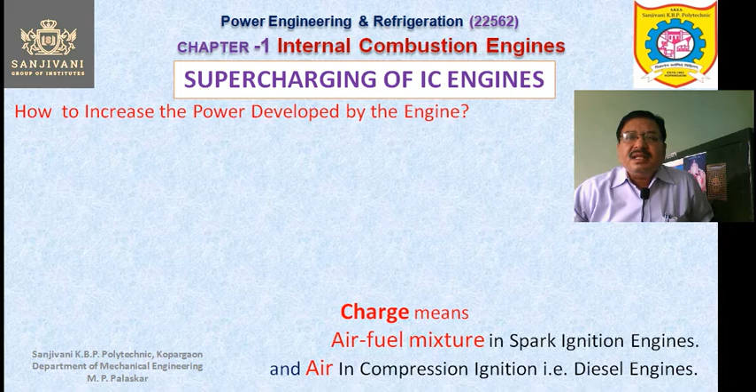So coming back to the supercharging of IC engine, let me ask you one question, that if you want to increase the power output of an existing engine, what will you do? How to increase the power developed by an engine? That is the question. Now in order to increase the power, common sense tells that you have to burn more fuel per unit time. If you burn more fuel per unit time, then the power developed by the engine will be increased.

But my dear friends, for burning of more fuel, you need more oxygen. So burning means it is the process of combustion, and combustion is the process of combination with oxygen. So for burning of more fuel, more oxygen, that means more air is required. If the quantity of air or oxygen is insufficient, then incomplete combustion of the fuel will take place, and this will lead to the wastage of the fuel, and more power will not be produced. So for producing more power, of course more fuel will be required, but more air, more oxygen is also required, then only more power can be produced.

So this can be done by inducing more charge or more air inside the engine cylinder per unit time. So again the question arises, how to induce more charge or more air per unit time? How to allow more air to enter inside the engine cylinder in a given time? That is the question. Because we are not changing the size or volume of the engine. We want to obtain more power from the given engine. So what can be done?

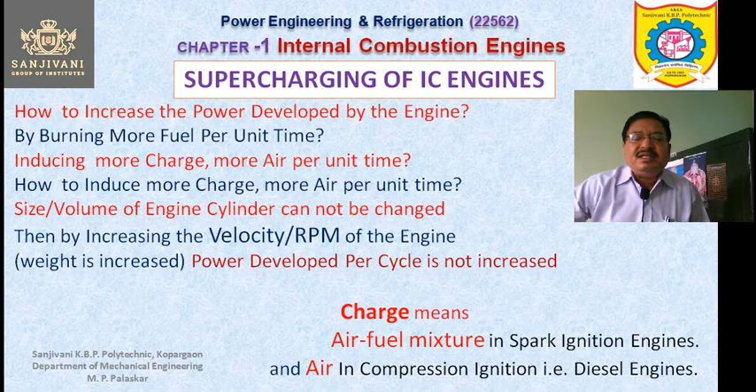So what should be done? What is the solution to this problem? How to increase the power developed by the engine? This can be done by increasing the mass or the density of the charge which is induced inside the engine cylinder. But here the mass of the charge which is entering inside the engine cylinder depends upon the atmospheric pressure. So the atmospheric pressure limits the mass of the charge which is entering inside the engine cylinder.

Of course, we cannot increase the volume because the size of the engine is fixed. The size of the combustion chamber is fixed. The diameter of the engine cylinder is fixed. So we are not changing the geometry of the engine. But we are interested to increase the mass of the charge which is entering inside the engine cylinder, and this is limited by the atmospheric pressure. So if you want more mass to enter inside the engine cylinder, we must increase the density because volume is fixed. So if you increase the density, then automatically mass will be increased.

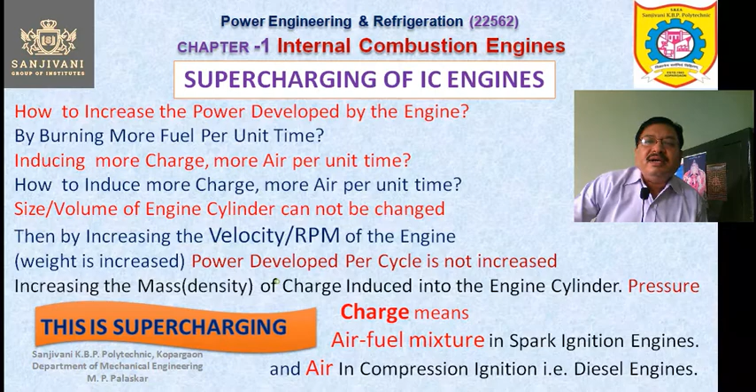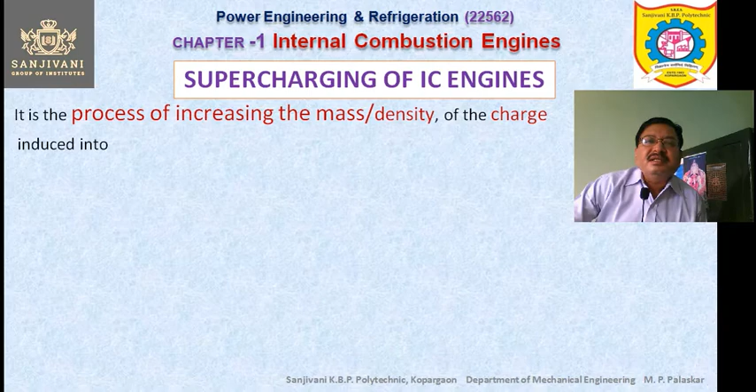Now let us go ahead to study something more about supercharging. Supercharging is the process of increasing the mass or density of the charge induced into the engine cylinder and thus increase the power developed by the engine. So this can be done with the help of a compressor or a blower. We can use some compressor or some blower that will increase the pressure of the air of the charge, and this will be supplied to the engine.

So the compressor is generally a rotary compressor. In case of turbochargers, which is one type of supercharger, we are using centrifugal compressors, which is also a rotary compressor, that is a non-positive displacement type of rotary compressor. So nowadays mostly we are using rotary compressors for supercharging.

So this compressor or blower itself is known as the supercharger, and this supercharger will also consume power. Many times this point is forgotten, that the supercharger is also consuming some power, though it is responsible for the increase in the power developed, it is itself consuming some power.

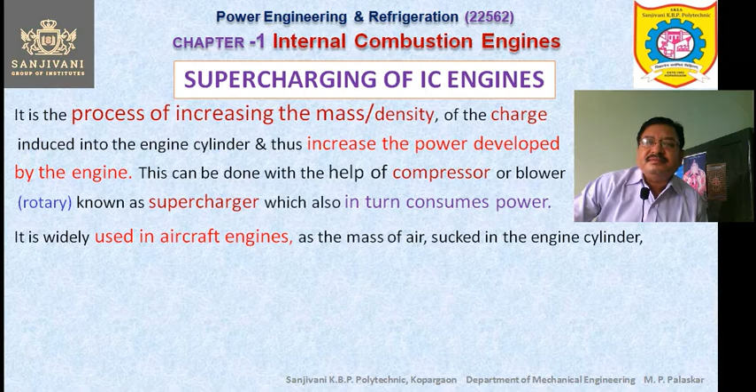So supercharging is widely used in aircraft engines, because at higher altitude the mass of the air sucked by the engine cylinder decreases. At higher altitude, the engine cylinder cannot suck more mass of air because the pressure of the air decreases with altitude. As we go higher and higher, the pressure of the air is reduced, and therefore the density of the air is reduced, and therefore the mass of air sucked by the engine cylinder at higher altitude reduces. So in order to avoid this, we are providing supercharging to aircraft engines, and thus the reduction in power due to higher altitude can be compensated by the supercharging process.

Now in other engines also we are using supercharging nowadays, especially in racing cars. In various 2-stroke and 4-stroke petrol as well as diesel engines, we are using supercharging.

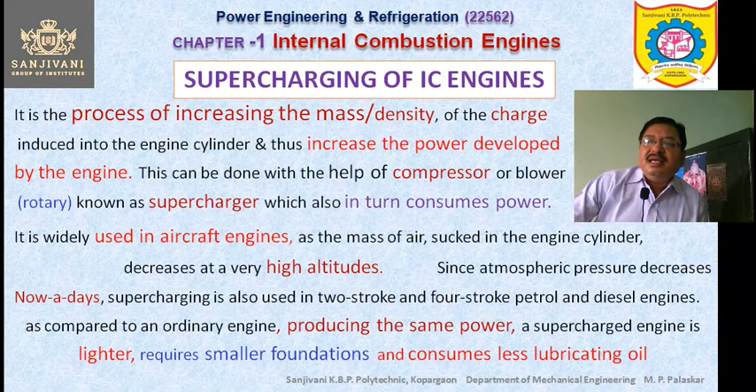Now if you compare with an ordinary engine producing the same power, a supercharged engine gives you some benefits. So what are the benefits of a supercharged engine over an ordinary engine producing the same power? First, it is lighter, weight is less, then vibrations are less, therefore small foundations are required, and the consumption of lubricating oil by the supercharged engine is also less, because at lower velocity we can obtain more power. When velocity decreases, the consumption of lubricating oil is reduced, because when there is more relative motion due to more velocity, there are chances of more friction. So lubrication should be more efficient, and this increases the consumption of lubricating oil.

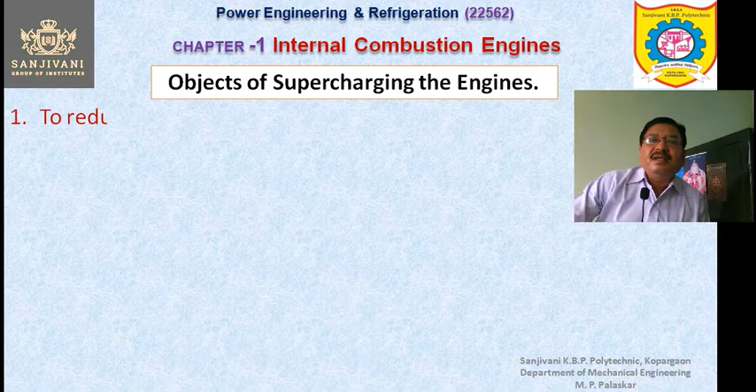Now what are the objectives of supercharging the engines? Why do we supercharge the engines? First of all, to reduce the mass of the engine per unit brake power. For obtaining the same brake power, we can decrease the mass of the engine, and this is a very important factor in case of aircraft engines, because in aircraft the weight or the mass of the engine should be less. So mass is a very important factor in case of aircraft engines.

So supercharging is required. One more reason why supercharging is required in aircraft engines, which we already discussed, is that at higher altitude the pressure of the air is less, so the density of the air is less, and therefore the power produced will be less. So we have to compensate this decrease in power by supercharging the engines in the aircraft. The second objective is to maintain the power of an aircraft engine at higher altitudes where less oxygen is available for combustion. This point we have already discussed.

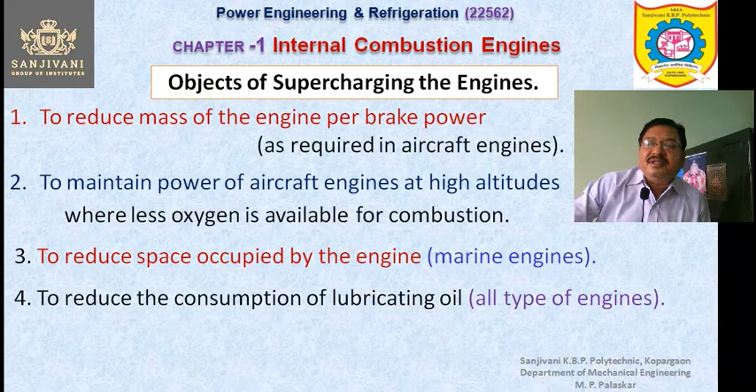To reduce the space occupied by the engine in case of marine engines, we can decrease the volume of the engine, we can decrease the size of the engine, so the space occupied will be reduced. We can produce the same power even with a smaller engine by using supercharging. So this is desirable in case of marine engines. To reduce the consumption of lubricating oil: we have seen that lubrication becomes simple, because when velocity is decreased, the friction is also reduced. So lubrication becomes simple, and therefore this point is advantageous in all types of engines.

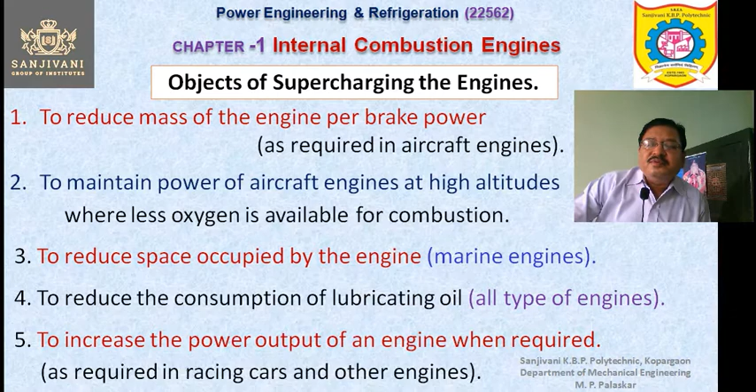Then to increase the power output of an engine whenever it is required, especially in racing cars. A sudden boost in power is required in racing cars, and therefore supercharging is required in racing cars.

What are the effects of supercharging? That we are going to study one by one. Of course the power output is increased, but what about the efficiency? The thermal efficiency may be improved, but what about the overall efficiency of the engine? Though the power output is increased, some power is lost in operating the supercharger. So if you consider this power, it is difficult to say that the overall efficiency of the supercharged engine is increased. Though the thermal efficiency may be improved, we can't always say that the overall efficiency of the engine is increased due to supercharging, but of course the power output is increased.

The volumetric efficiency is increased. Volumetric efficiency is very important in case of engines. Volumetric efficiency is nothing but the ratio of the actual charge induced during one stroke or one cycle of the engine at NTP condition to the stroke volume. So the volumetric efficiency is definitely increased because the actual charge induced inside the engine cylinder is increased, because the density and pressure of the air entering the engine cylinder is increased. The weight of the engine is reduced due to supercharging.

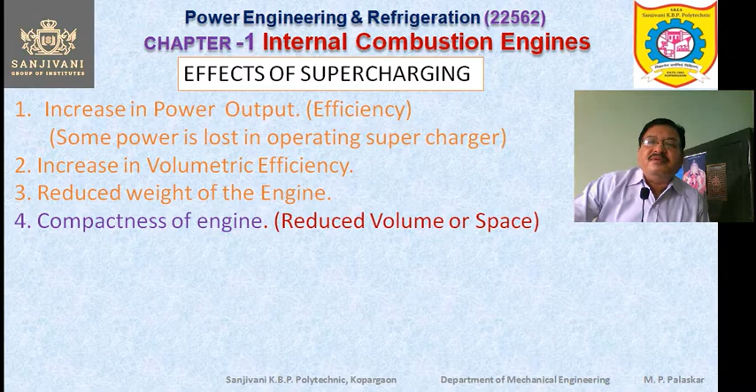Compactness is achieved because the volume or the space required is reduced. So we get a compact engine due to supercharging. The combustion is improved because a better turbulence is achieved due to higher pressure. The air is entering inside the engine cylinder at a higher speed, higher pressure. More quantity of air is entering. So the turbulence is improved, and due to that the combustion is also improved in the CI engines, compression ignition engines. Thus the performance of the compression ignition engine is improved because combustion is improved.

But in the SI engine, the chances of knocking increase due to supercharging. So reduced requirement of lubricating oil: the consumption of lubricating oil is reduced due to supercharging because the velocity is reduced. And reduced possibility of knocking in CI engines, but in SI engines the possibility of knocking actually increases due to supercharging. Due to reduced vibration, the foundations required are smaller if we are using the supercharging process. These are the effects of supercharging.

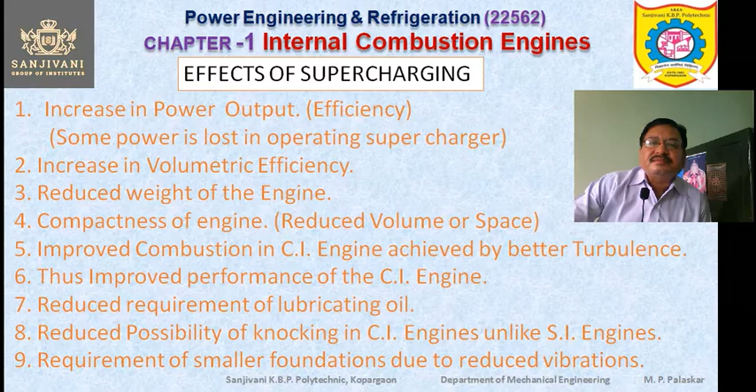Now let us study turbocharging. What do you mean by turbocharging? We have seen that an additional compressor or blower is required for supercharging, and this additional compressor or supercharger also consumes power. Though the power output is increased, more fuel has to be burnt for this increase, and the power consumed by the supercharger may sometimes even decrease the overall efficiency of the engine. So what should be done to overcome this problem?

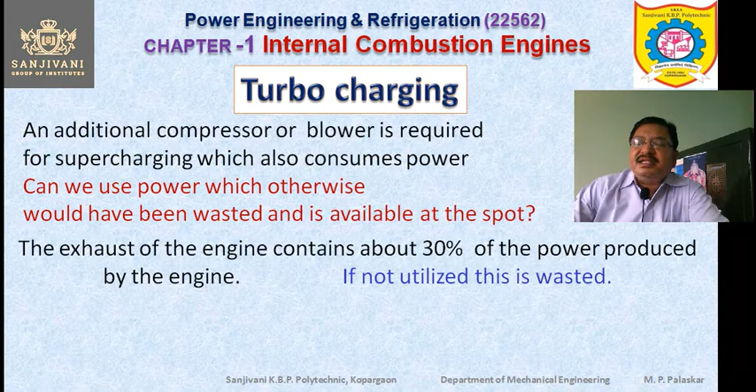Can we use power which otherwise would have been wasted and which is available at that particular spot? So what is this power? That is nothing but the exhaust of the engine. The exhaust of the engine contains about 30% of the power produced by the engine. The exhaust gases are hot and have some velocity, some pressure, so some energy is present with them. If we don't utilize it, that is wasted. So how to utilize this energy of the exhaust gases?

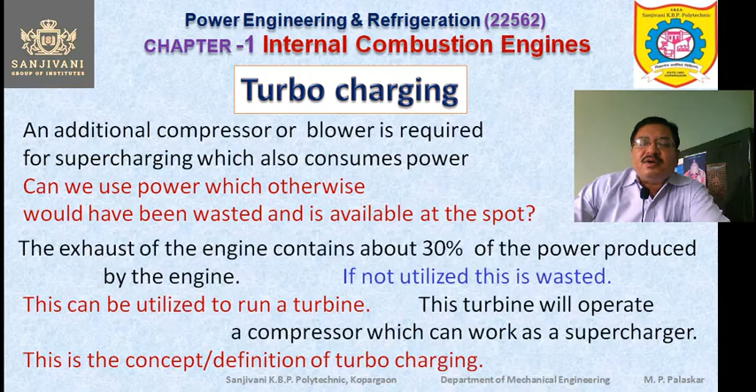The exhaust gases can be utilized to run a turbine, and this turbine will operate a compressor which will work as a supercharger. This is the concept of turbocharging. Turbocharging is the process of increasing the power output of an engine by supplying compressed air to the engine, where this air is compressed by a compressor operated by a turbine, and the turbine uses the exhaust of the engine to produce the power. This is the concept or definition of turbocharging.